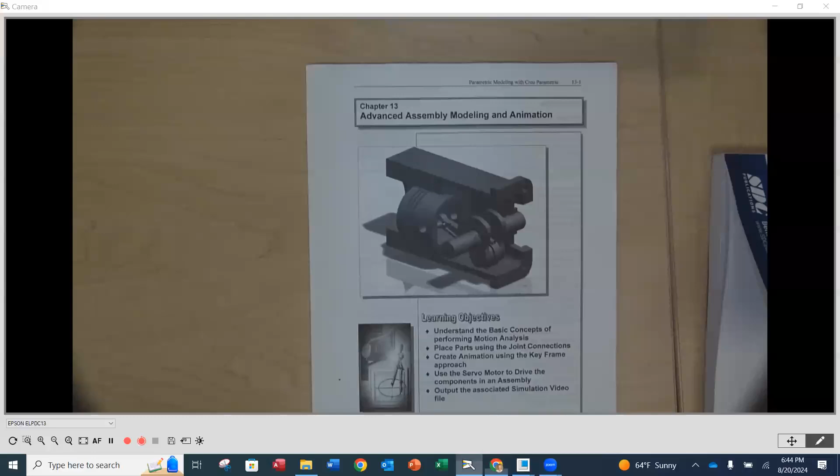So if we go to our learning plan in module 1, you'll notice number 4 says we're going to complete the crankshaft assembly tutorial. I have the PDF for you to reference, as you need to, and I also have it underneath the camera here — this is the in-person version of that PDF.

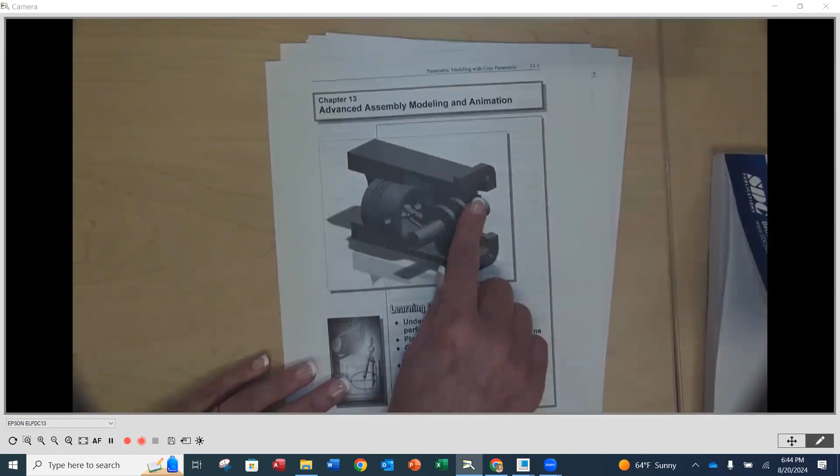So what we're going to be doing is creating this crankshaft assembly here. We've got a piston that's going to be going back and forth in a bore, a connecting rod, and then a crankshaft that this is going to be going around. We're going to be building this outer portion, putting it together, and then animating it so that you can see the motion going back and forth.

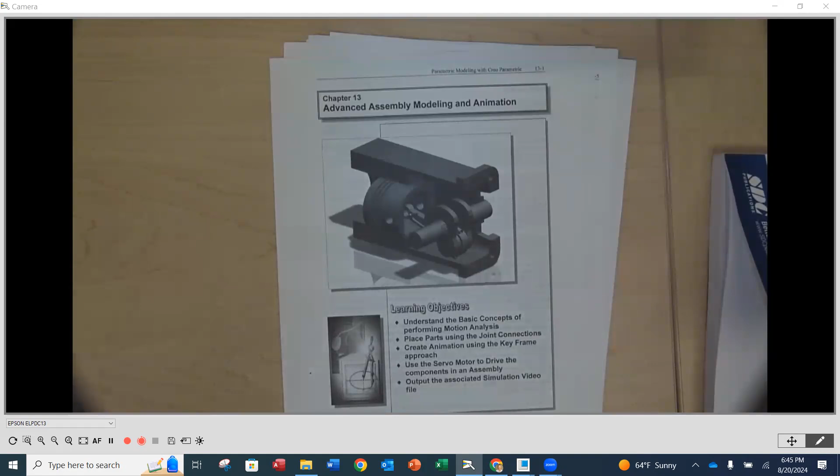It's a nice, simple assembly to put together on the modeling and assembly side of things. It's a great way to remember how to use Creo, because it might have been a little while for some of you, but we're going to be adding on and doing the animation of showing it going back and forth.

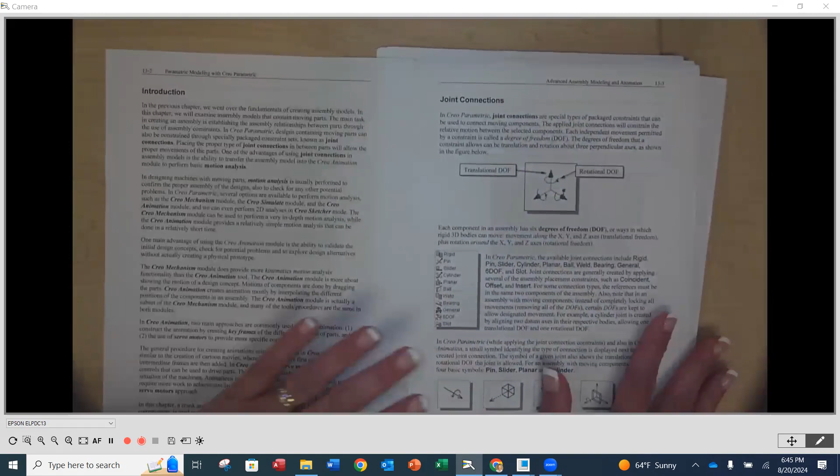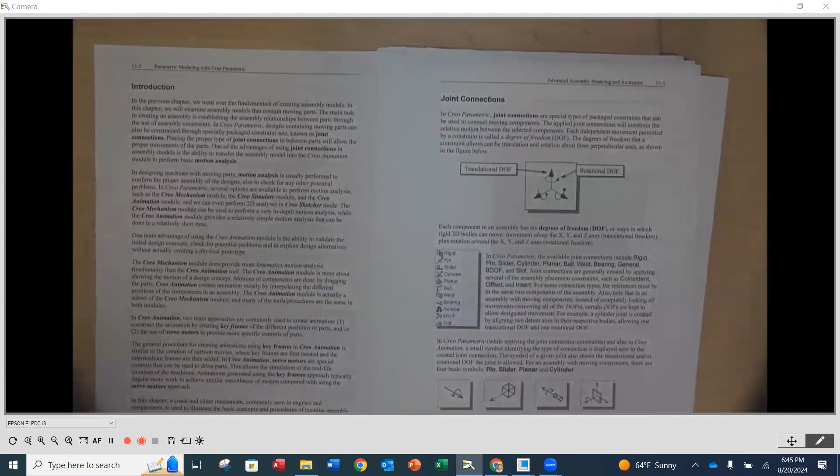First things first, though, we have to create the models, the detailed drawings, and the assembly for what we have here. As we look at this handout, it talks about some advanced assembly concepts. I'm not going to get into that at this point, because I'll be demonstrating some of these things probably the next time we're together or next week — we'll see where timing is.

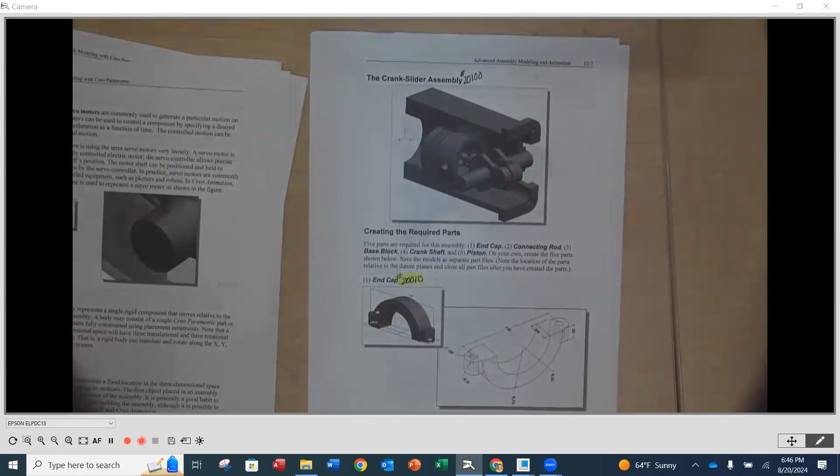But as we go in here, you're welcome to do the reading, starting on page 13.7 is where we see the individual parts for this assembly. First things first, we have to create these models. So the task you're going to have starting today is going to be starting on page 13.7 — you are going to be creating each one of these parts.

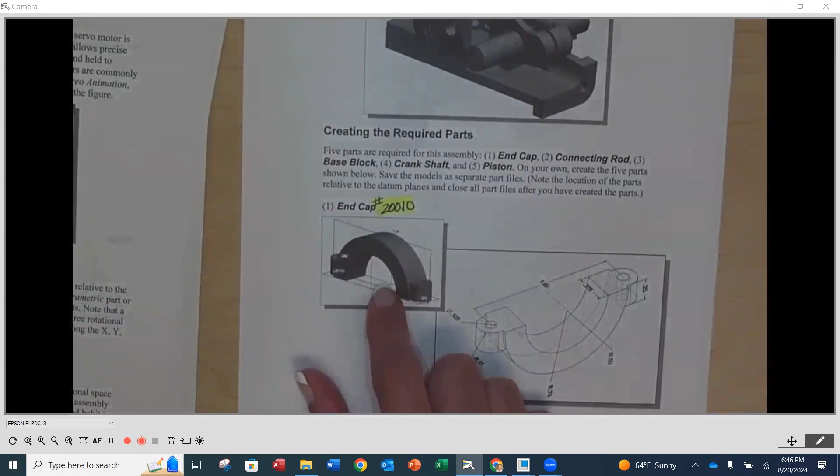The first part that we have here is the end cap. You'll notice that even in the PDF, I have a part number next to this — the part number is 20010. This is the file number that you're actually going to call it. Do not name it or save it as end cap. Save it as 20010, because when you pull up your borders, it's going to automatically populate the part number in the right spot in your title block.

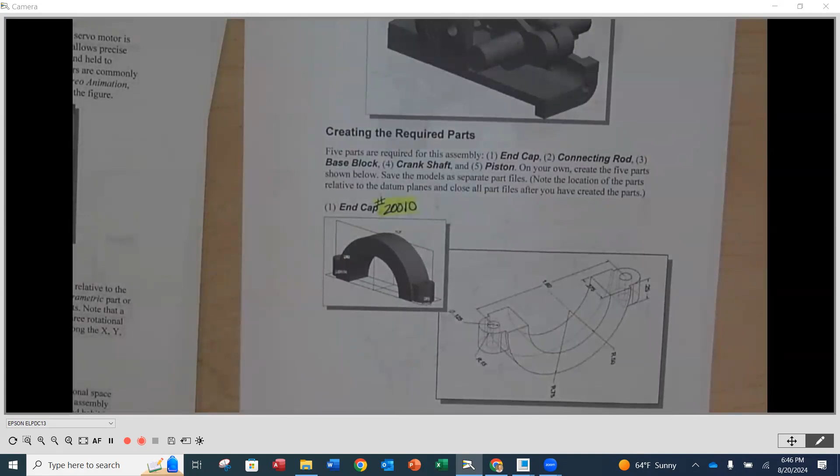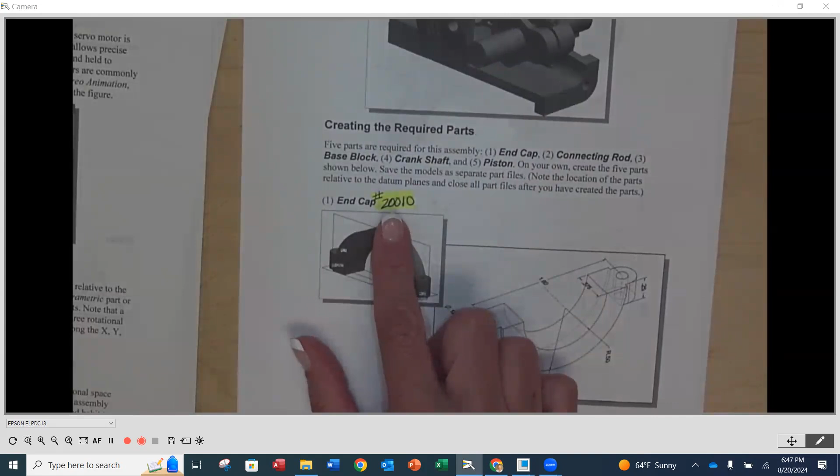If you save it as end cap instead, then where the part number is in the drawing border is going to say end cap and not the part number. So I've given part numbers to each one of these — make sure you save the part number for the end cap as 20010. Then as we go, there are going to be 5 individual parts that we do.

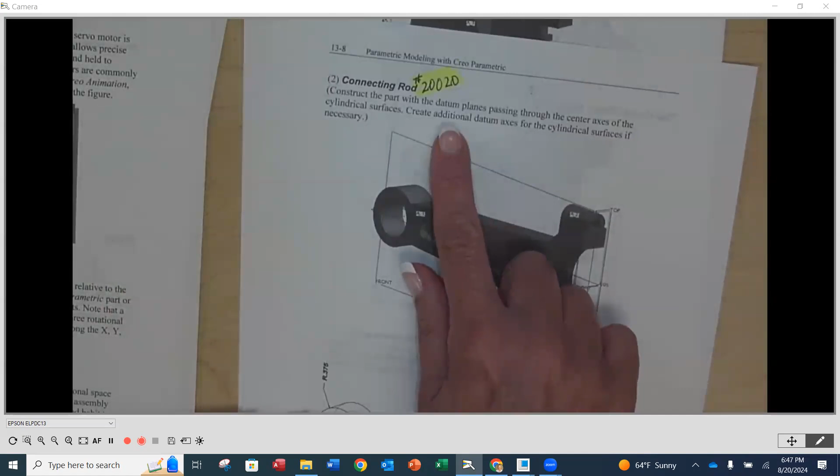Our next one is going to be our connecting rod, which is this — this is going to be 20020. Then we've got 20030, which is going to be our base block, which everything is going to be mounted inside of. Then we're going to have 20040, which is our crankshaft, and 20050, which is our piston — that's the last part.

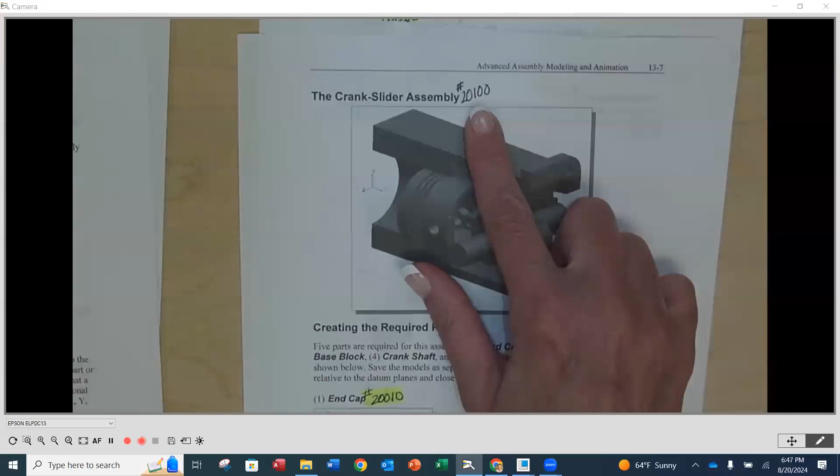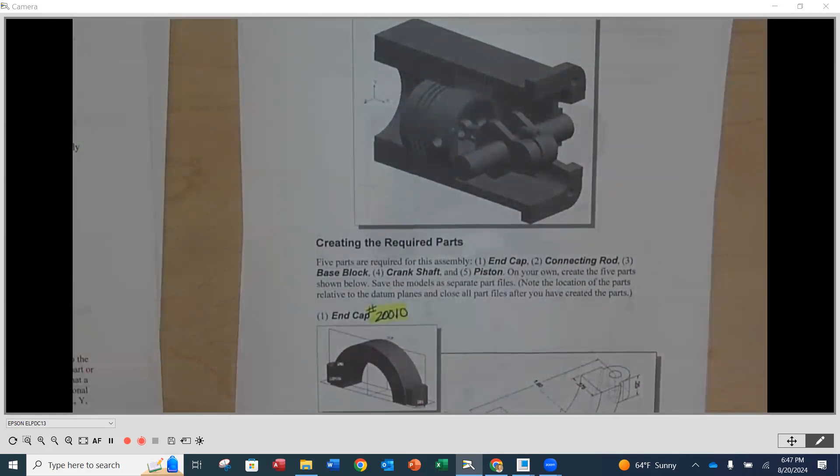So, 5 individual parts. The assembly itself is going to be 20100 — that's the overarching assembly drawing number that we call it out as. Again, your files are going to be named by the part number, so that when we pull it up in our border, it populates in the right place in the title block. Now, the other thing I want you to pay attention to as you go through here is the way that the planes are set up for each one of the parts.

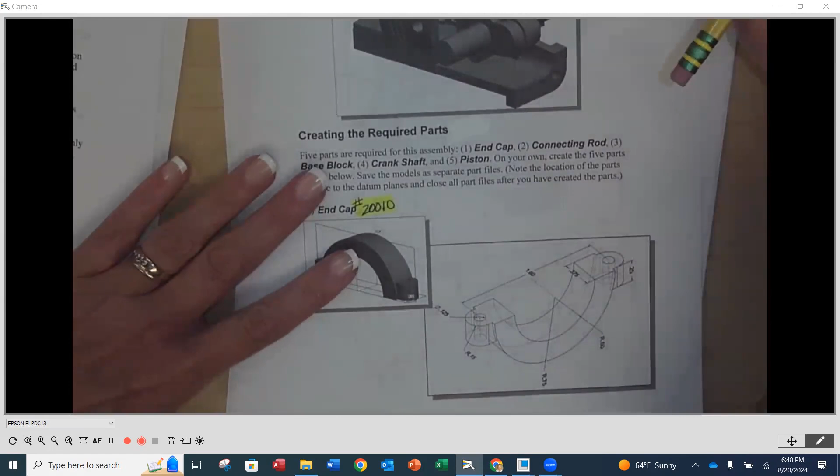So for instance, I want you to pay close attention to, on this end cap, notice that the top plane is here, your front plane is right here. Your top plane is going to be going through right here, and then your right plane is coming in from the bottom.

Try to line those up when you're creating those. If you don't, it's not the end of the world, but it makes it easier later when we're doing the assembly the way that they have it in the tutorial. Just so that you know.

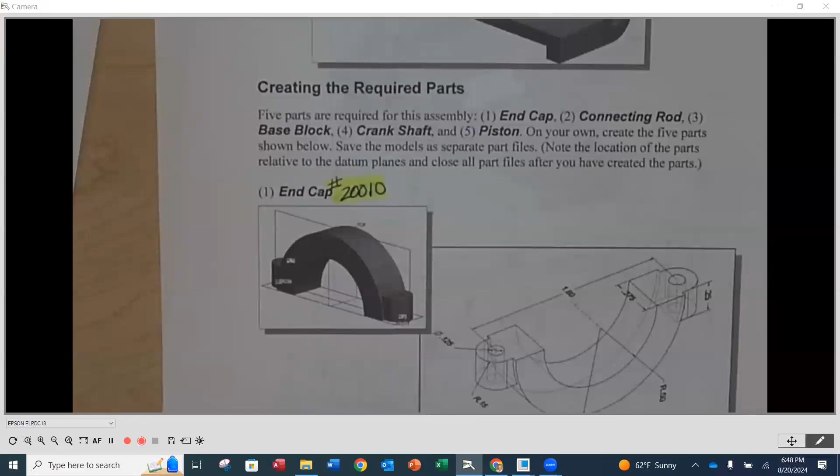So same thing for the connecting rod. As we turn the page here, the front plane is what we're going to be doing our drawing on. Our top plane is right here, and then the right plane is going down here. So essentially, if you model it, it's actually sitting like this, because that's where the origin is, right in here.

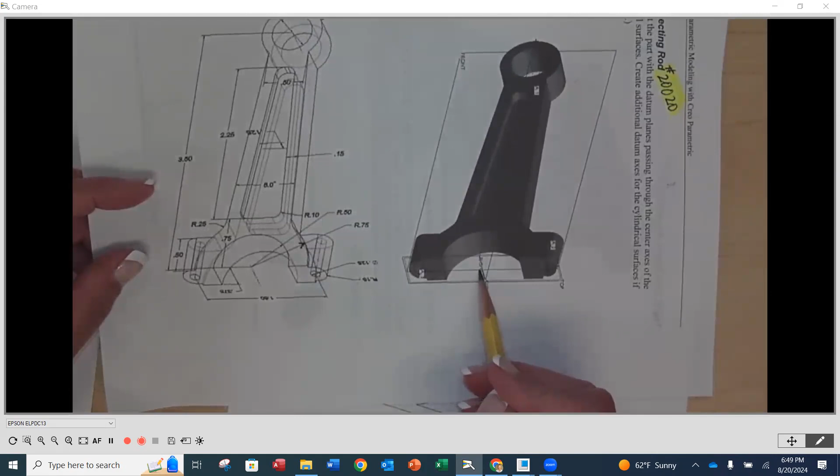Same thing for the base block. Kind of gives you the perspective of the planes. If you have questions about that, let me know.

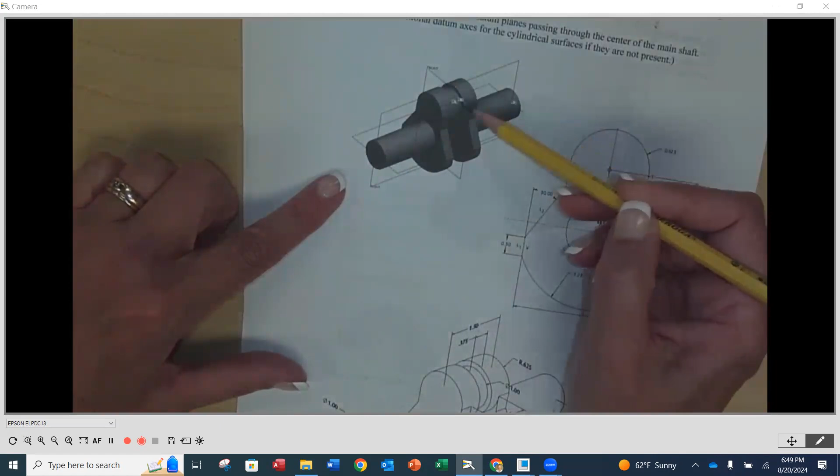And then crankshaft. Notice that we have the front plane right in the middle here, and then it's evenly distributed on either side, and the planes are going down the middle. And then lastly, for our piston, we have those there as well. It gives you some hints and dimensions accordingly.

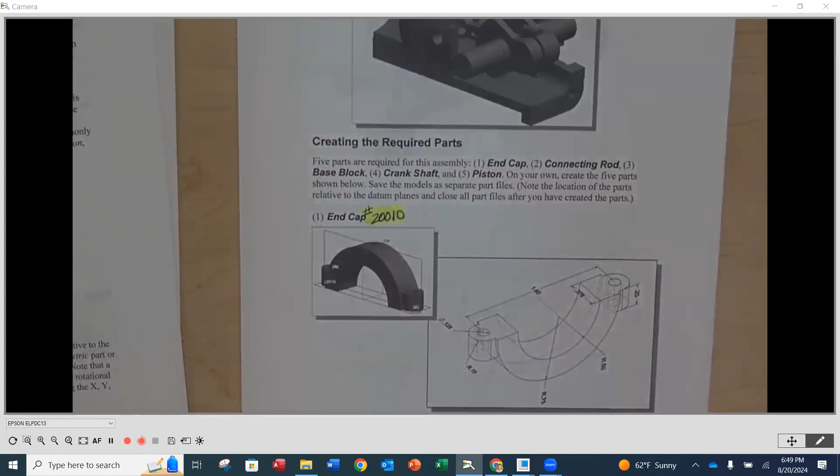So what I wanted to do is start by doing a demonstration of our end cap. This is a pretty simple part. And then I'm going to let you guys go a little bit, because part of what we're doing in this class is getting you prepared for how things are going to be out in industry. A lot of times you're going to be given a set of sketches or drawings that we want you to convert, and now you've got to get these into their final form.

First things first is going to be the models. Now I want to go back, and we will be looking at the end cap, but I want to show you what you're going to be handing in as far as this assignment. So part models are first, and that's what we're going to be talking about here today.

The second thing that you're going to do is once we have the part models, we're going to put the assembly together, so this is going to be the assembly model. Then the next part of this assignment is the detailed drawings for each of the individual parts. So we're going to have 5 models on the top, and that's going to be 5 details then for the detailed drawings. Then we're going to have an assembly drawing that corresponds to the assembly model. Those two go together. And then lastly, we're going to have the animations that we're going to be creating at the end. But first things first, we have to do the part model.

So you've done these first 4 things in your fundamentals class, and that's why I think this is a great project. The parts aren't super simple, but they're kind of medium parts to work with. There's some geometry there, but they're not super complex. They're all things that you would have done before. And this is a great opportunity, once you get the models made, to now make the detailed drawings.

And remember, how do I put a border in? I'll demonstrate that for you. Don't worry, how do I do my dimensioning? I'll talk about some of the nuances. And it gives you that chance to reacclimate to the software before we start getting into some really advanced stuff.

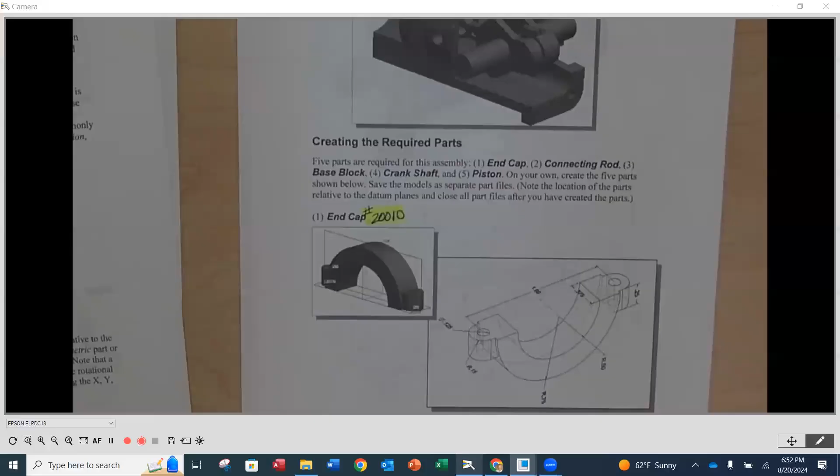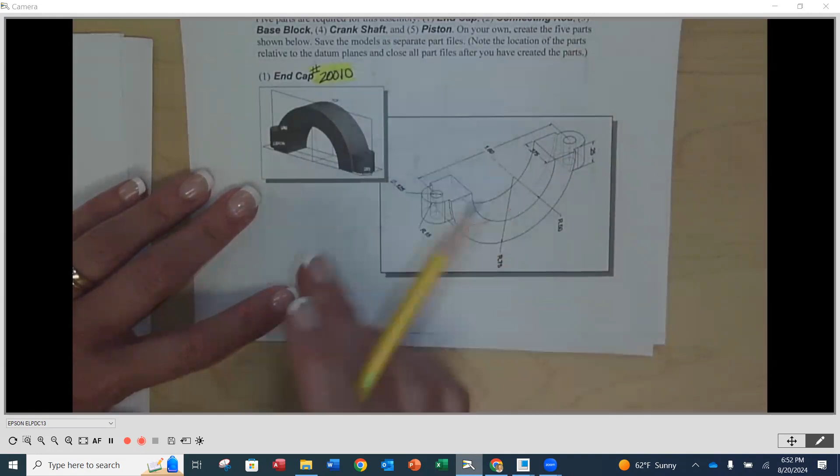Okay, so let's take a peek at the part models. Like I said, let's start out by looking at the end cap. So what we're going to do is create this end cap. The dimensions are here in this perspective view, but this is giving us kind of how we're going to be orienting the part in the actual part in Creo.

So I'm going to go into Creo, and first things first, you want to make sure that you have your working directory selected. Don't just start new and open — even if you're opening something out of your working directory, you have to first set that working directory before you open up out of it. It's going to let you, but then you're going to have problems saving later on. It's just kind of the weird thing about Creo. So set your working directory, make sure it's where you want it to be, and then you're going to hit OK.

I selected it. Why is it not? Okay, I think we're okay. Then you're going to go into new.

And if you remember, it's going to pull up this menu, and we need to select what we want to do. We're going to be creating a part file. And remember, our file name is not going to be the name of the part. Our file name is going to be the part number.

So for this one, for the end cap, it's 20010. And in the common name, you could put end cap. Go ahead and use the default template, and you can hit OK.

Yeah, oh yeah, it's going to tell me it's already there. So I'm going to hit close. I have to do an _1. Don't do an _1 for yours. Just put in the 20010.

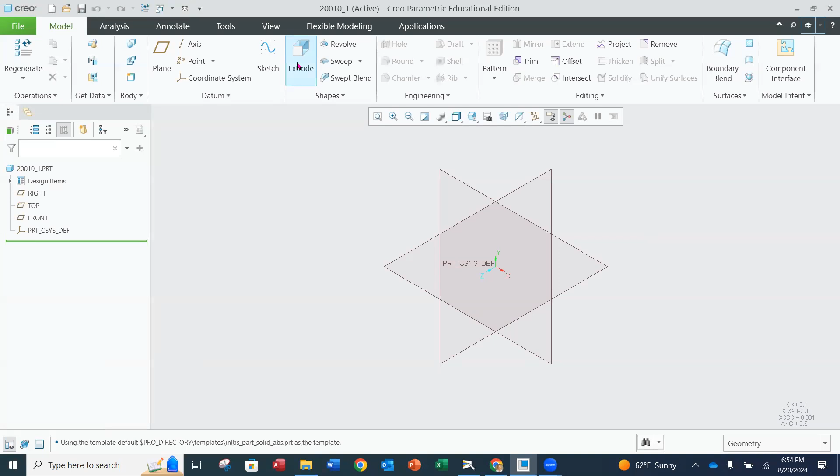And now we're going to be in that familiar place kind of coming in here. Now at the top, we want to make sure that we're on the ribbon that says model. And then these are going to be kind of our familiar commands. In the middle-ish here, we are going to do an extrude.

So we're going to go in under the extrude, and the extrude is going to ask us, what plane do you want to be on? We want to be on the front plane. So over here, we just want to highlight, and it's going to be this one right here. Make sure it highlights and it says front. Once it does, you can left click.

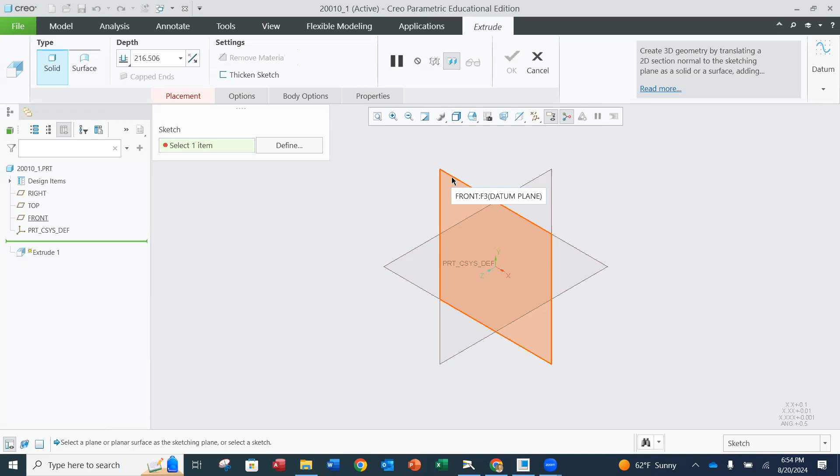And now this was that configuration that we did that now is orienting the sketch plane to where we're looking at. This is that, whatever it was, display to 2D or sketcher to 2D. And at the middle here, this is going to be our origin. This rectangle on the outside is our front plane.

So now when we look, what we're going to be creating is I'm going to start with a circle. This is another nice update that you're going to notice. We're going to go on the origin. Remember, in order for this to know in space where we're at, we always have to tie to the origin. So try to look at your part where there's a natural origin, and that's going to be the center of our planes here as we look.

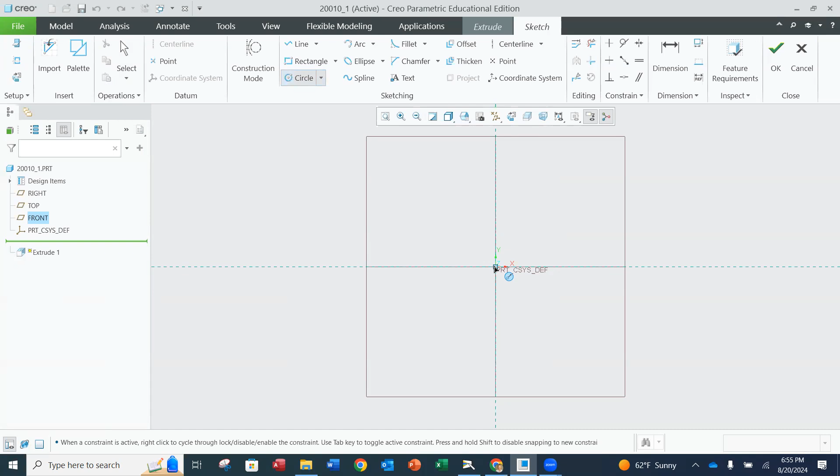And I'm just going to do a simple circle. Once we get done with that, you can click on your middle roller mouse button, and that's going to end that circle. So it's going to kind of be getting used to the mouse again. It's a little bit different.

Now, remember how Creo used to use these big numbers, always was like, right now it says my diameter is 190 units big. And if you would double click on that and you would change it - so in our case, this needs to be a diameter of, it's a radius of 0.5, so it's a diameter of 1, enter. It would make that circle super small.

Do you guys remember that? Or you'd have to zoom way in. Look at what it does. It doesn't do it anymore. It automatically scales the drawing now. That is something that matches what SolidWorks does, which is really nice. And that's an update in this version, which is cool.

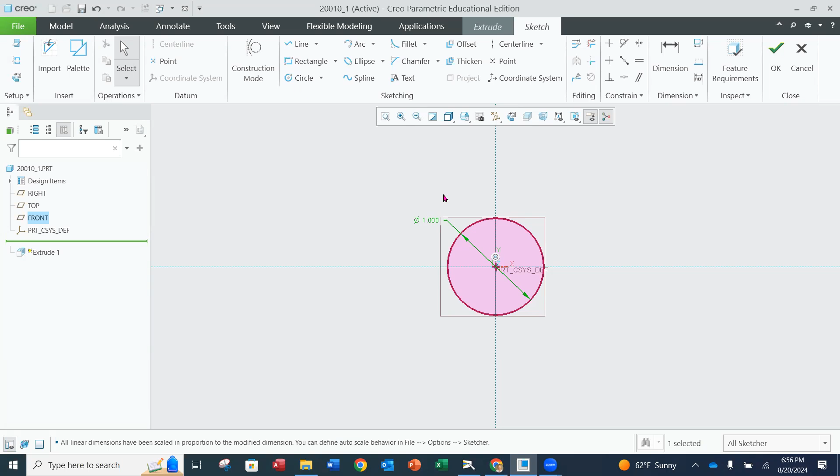So now we have that circle there. I'm going to do my next circle, share the same center, a little bit wider, middle mouse button to end that one. And this one's going to be 1.5 diameter because it's a radius of 0.75.

Now, in order to make the flat here, I'm going to do a line. That line is right up here in the sketch mode. I'm going to left click when it snaps to the intersection here and across here. And then I'm going to hit escape.

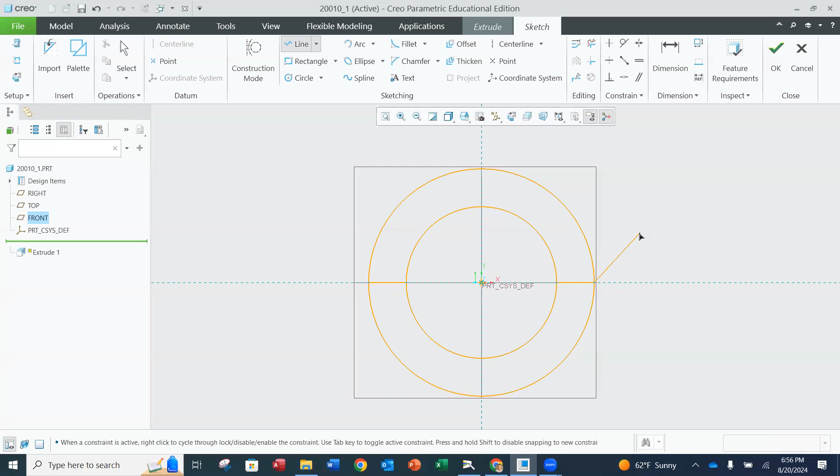The nice thing about Creo is that I'm still in my line command. It didn't exit out. So I hit escape once, and now I can continue with another line over here and here. And I can hit escape, and I have to hit escape one more time to end that command.

Now that I have these lines here, because I only want half of the circle, or the arc there, now I'm going to go up. If you remember in the editing area, this is going to be delete segment.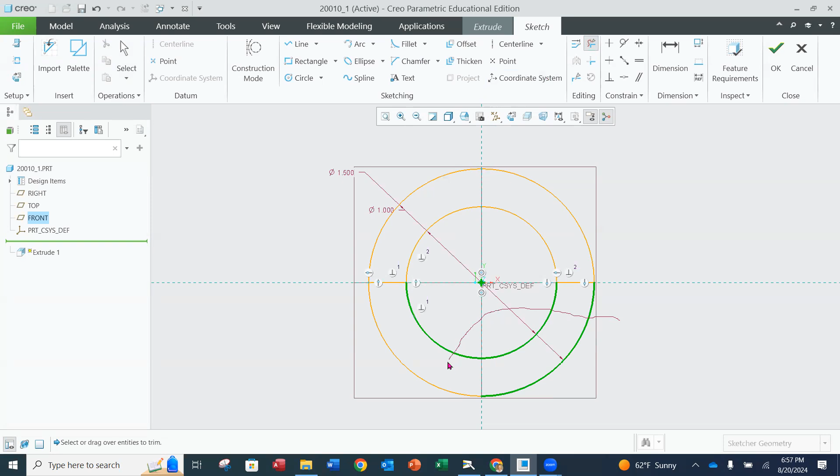I'm going to click on that, and how delete segment works is I am going to left click and drag across the portions of the lines that I don't want. And then I'm going to release when they're all selected. Do you guys remember that? Okay.

It is really nice. It is really nice. Now what I'm going to do is I'm just going to left click or hit escape to get out of that command. Otherwise it stays in there. Okay. And now, I don't know, I'm kind of anal this way. I like my dimensions to kind of be off the part so that I can see them.

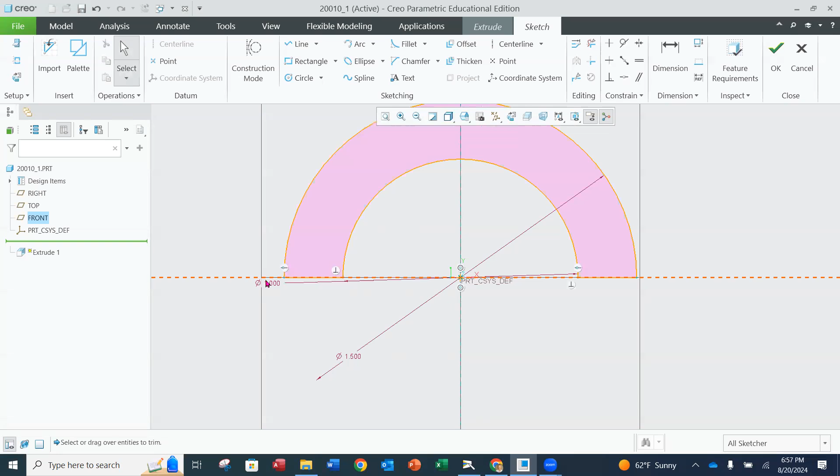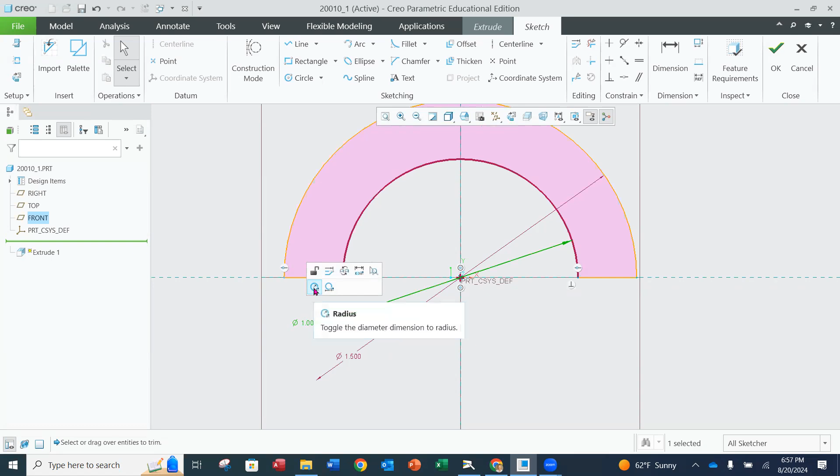Additionally, right now, these are diameter dimensions. If I would use this for my drawing and I would export it, or I would start the drawing from this model, it would dimension those as diameters. Since they're not full circles, and you'll notice that on our model here, they need to be radiuses. So I'm going to left click on that dimension, and right here, this dialog box is going to come up, and I can change this now to a radius. So it toggles between radius and diameter.

Same thing for the 1.5. I'm going to left click on it, and I'm going to toggle to that radius. And now this way, when I do my drawing, it's going to go to the radius right away. I don't have to mess around with that and change it. You can at the dimension level, but it's nice to do it here so you don't have to worry about it later. So those are the first two radiuses.

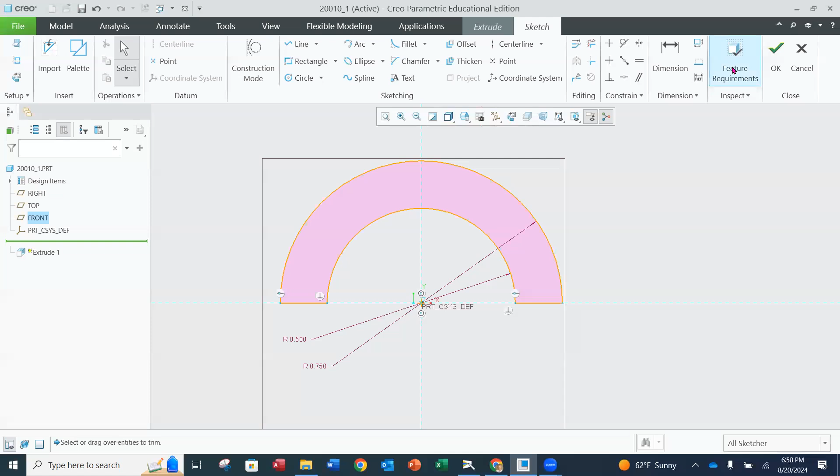So now what I'm going to do is I am going to check if I am fully defined. Creo does this differently than SolidWorks. SolidWorks will have it fully defined at the bottom, and it'll have everything black. But what we need to do, if you remember, we got to go to feature requirements up here next to the okay. And as long as we've got all green check marks, that means that we're good to finish up this command and go to the extrude. So I'm going to hit close. I have green check marks and I'm going to hit okay.

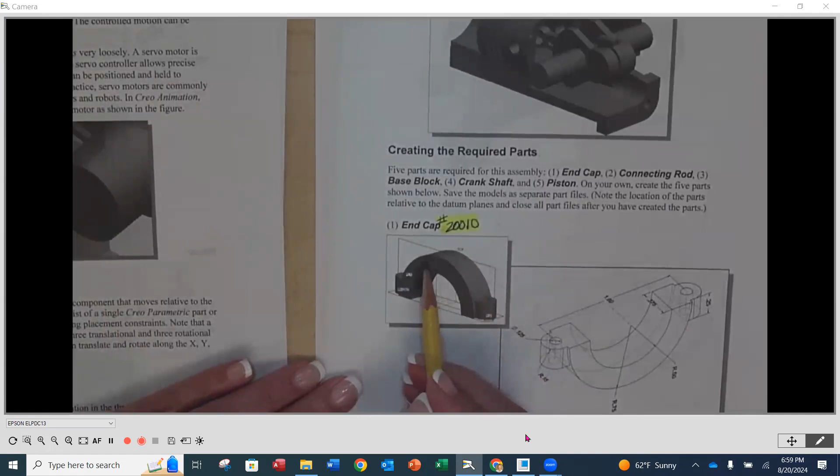Now I want to look at how this is going to distribute. So remember, I sketched on my front plane and we're in the extrude command. So it's like creating thickness here. If we look at our page 13.7 underneath here, you're going to notice that we want this plane to go through the middle of the part. So instead of extruding all on one side, we are actually going to do what they call in Creo a symmetric extrude. So we're going to go down underneath depth here for how thick we want it to be.

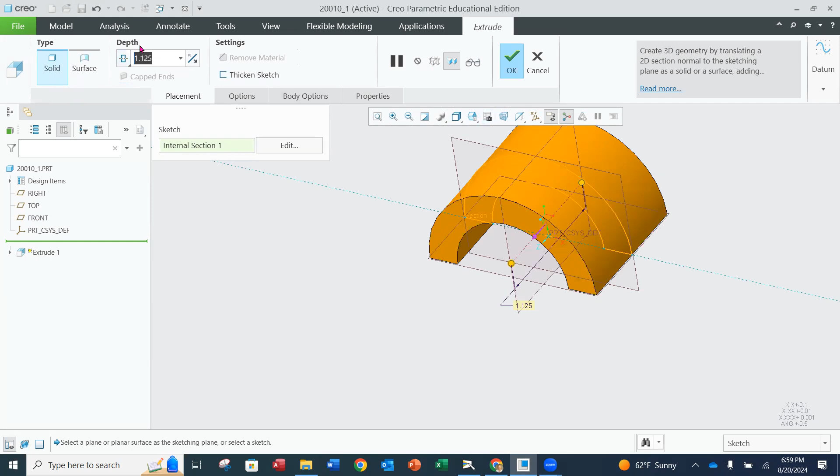We're not going to go to a blind depth. We're going to arrow down and we want to click on symmetric. Now what that does is it's going to evenly distribute whatever our dimension ends up being equally on either side of that plane rather than on one side of the plane. You guys remember that? Okay. So now you can kind of see that happening. And I want this distance to be 0.375 thick. Enter. And then that's going to be the thickness that I'm at. Okay. And if it looks good, you're going to hit okay. And now that's my first feature.

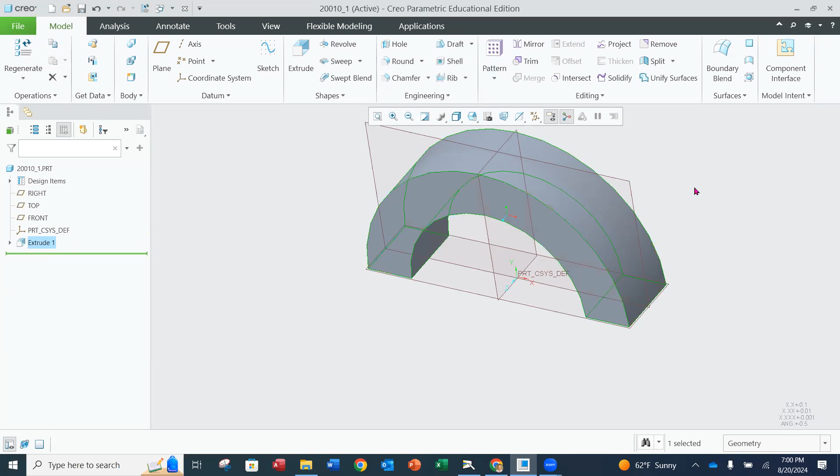Now, something I want you to do, which is very good practice. We were doing this in GD&T when we were looking at SolidWorks. I want you to rename this from extrude 1 to something that means something. Now, for this one, I'm going to call this profile. And if you use more than one word here, again, Creo needs you to do like an underline instead of a space. It won't accept spaces at this level either. I'm just going to use one word, call it profile. And then I'm going to left click off of it. Okay. And there we go. So that's our first feature, if you would.

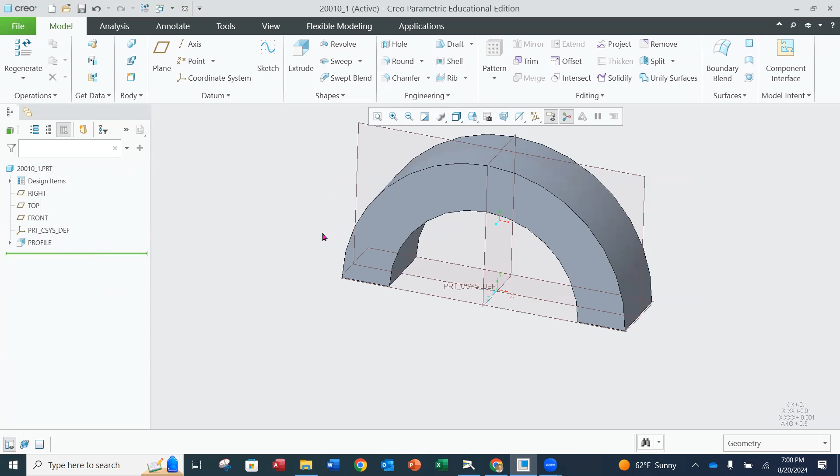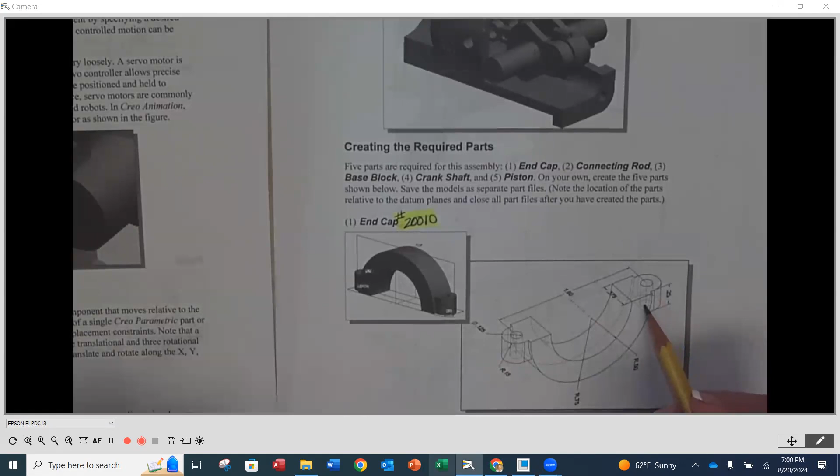The next feature that I'm going to create, I go back underneath, I'm going to create one of these feet on this side. Okay. Now I'm going to do the half circle. It's going to be from center half of 1.6 to one side. And then I'm going to extrude one side. I'm going to then put my hole in. And then after I have the foot and the hole in place, I'm going to mirror that as features on the opposite side to finish my part.

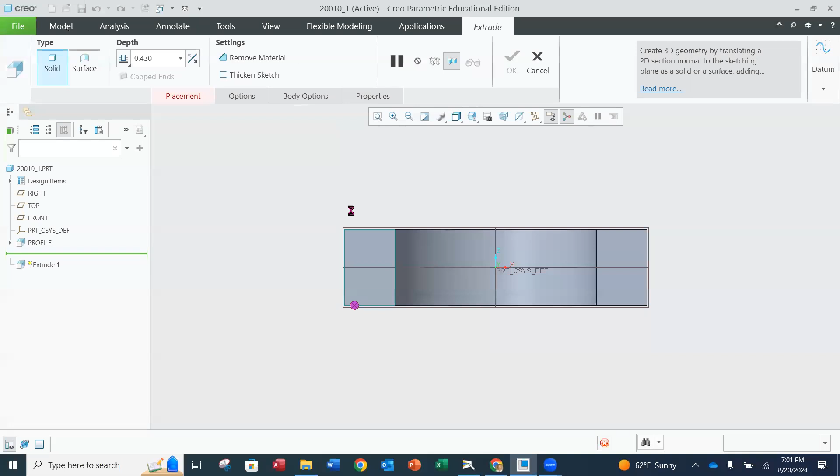So I'm going to go back to Creo over here. I'm going to rotate this around. Remember my middle mouse button, I can use that to rotate the model around. I'm going to do another extrude and I'm going to pick this surface on the bottom here. Okay. And now I'm going to sketch on this. I'm going to start on the left side. You could do left or right side.

I'm going to do the left side. I'm going to do a circle and I want it to be in line with my origin. I don't know if it's not going to grab it. That's okay, I can make that happen in just a little bit. And I'm going to make a circle here, and then I'm going to middle mouse button to end it.

Double click here on that diameter. It's a radius of 0.15, so it's a diameter of 0.3. And I'm going to left click it and change it to the radius right away. Now, I need this to be in line with my origin, so I am going to add a constraint.

Okay. So the constraint I'm going to add is going to be the horizontal constraint. I want it to be in line horizontally with the origin and the center of my circle that I created. So I'm going to click on horizontal. I'm going to click the center of my circle and the origin. And now it's going to align those. And you should get this little symbol here with that little dotted horizontal line.

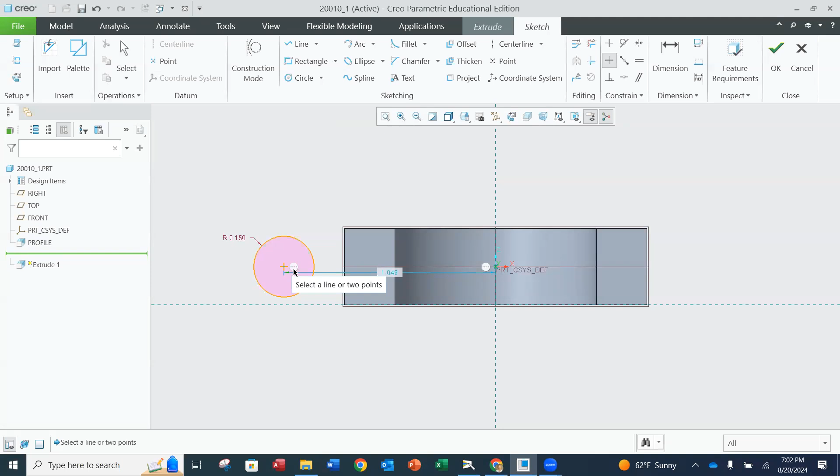Okay. Now, the other thing I need to do is I need to identify what my distance is from the origin out to the center of that circle. And that needs to be half of 1.6. So I'm going to double click on this dimension and it's going to be 0.8. If you don't have that dimension, then just make that dimension from that origin to the center. Okay. And now that is 0.8.

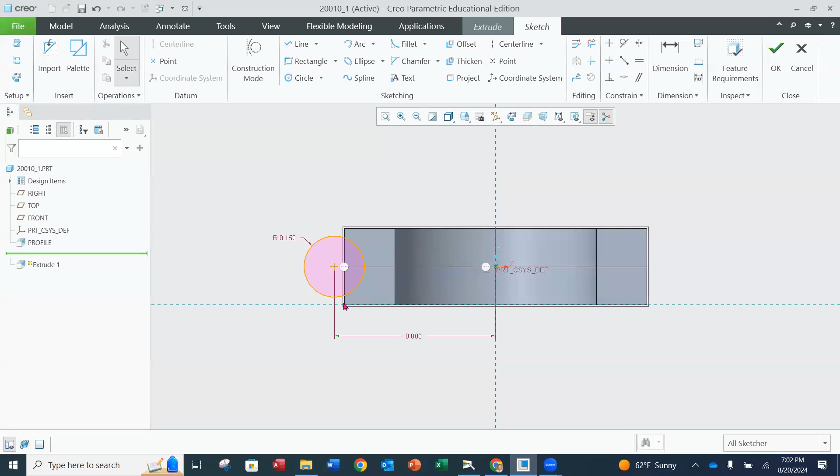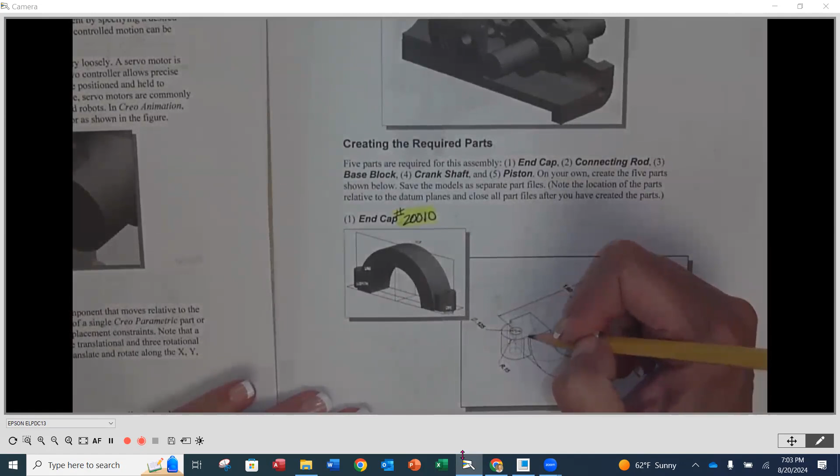Now, if we look at the configuration here, it's not just a circle going up. There's two lines that are going to go to the center. Now, because this is arched, if I go to the end right here, it's not going to blend in as it goes up. Do you guys see that? Because it gets wider. Okay.

So what I'm going to do is I'm actually going to create my lines to the inside portion and then extrude that because it'll merge the material anyway. So it's not going to double up on material. It's just going to merge those together. So I'm going to go back over here. And here is the inside of that foot. I want to project that.

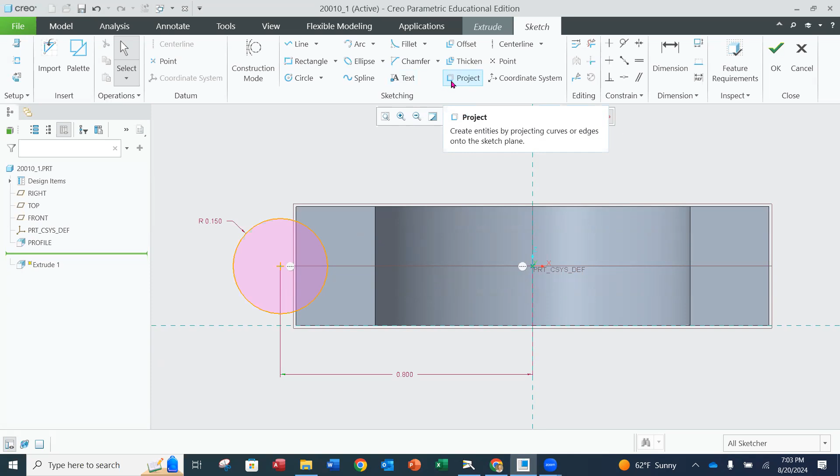Now, if you remember back from the fundamentals of 3D modeling in the first Creo class, we can project elements from previous sketches and use them in our current sketch. So you'll notice that here is the side of that, if you would, the bottom of that profile. I'm going to take a horizontal line. I'm going to go all the way to that and then extrude that up. But instead of drawing another line, I'm just going to simply project this line right here.

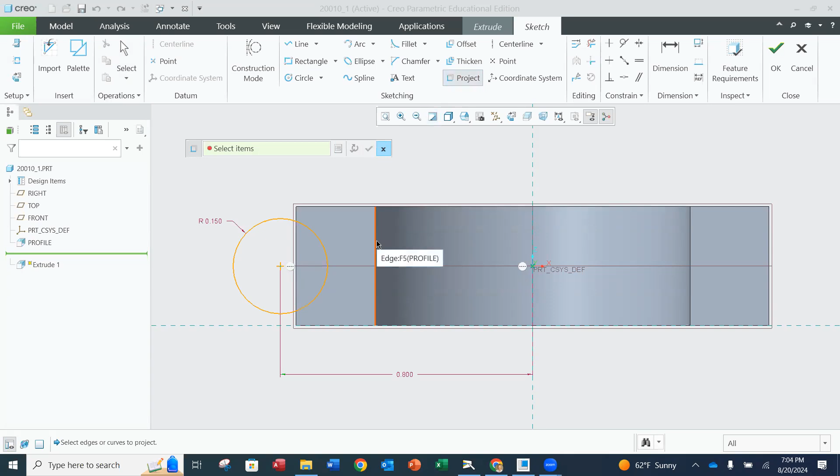When I hover over it, it's going to highlight. I'm going to left click it. And then I have to hit the green check mark here. Okay. And now that line is in my current sketch. Does that make sense to everybody? You can use stuff that you've already created in previous features from those previous sketches, but you have to project them into your current sketch. So now I have that horizontal line there.

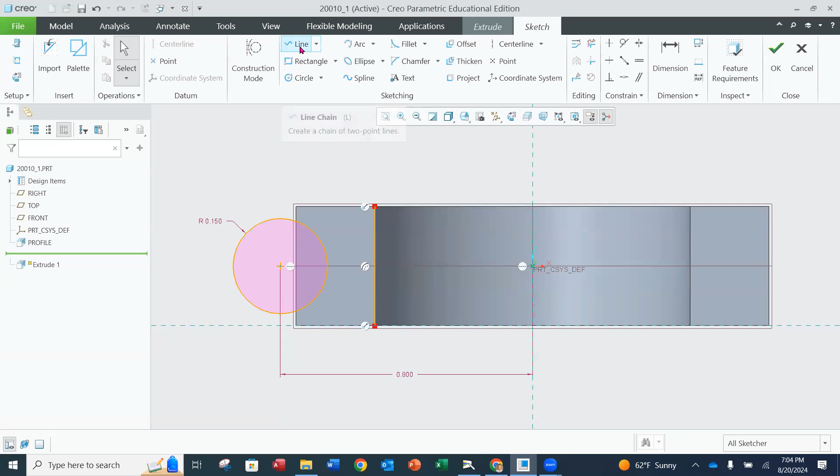I'm now going to create my lines from the quadrant. So I've got to start at the quadrant here, so it's gonna snap to that quadrant. I'm going to left click and then, oopsie, I don't think I got the quadrant. Let me try it again. Line, left click, and then I'm going to go all the way over here. Make sure you get the quadrant, and then it makes a horizontal line, and I'm going to left click when it gets there. And then I'm going to hit the middle mouse button.

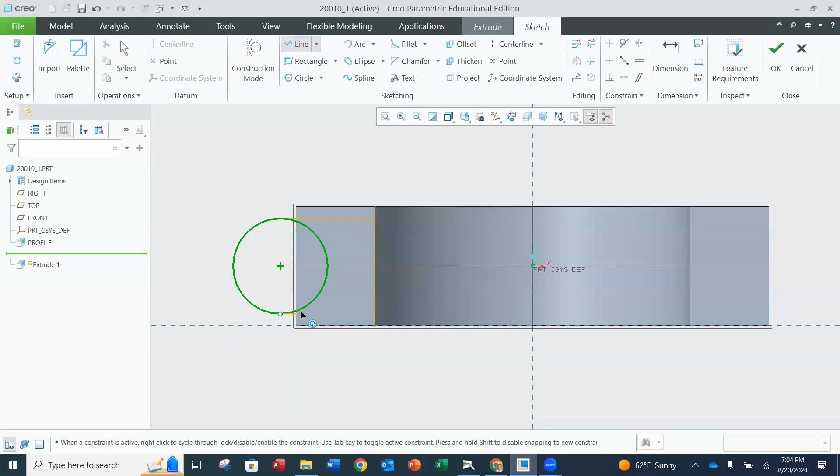I'm still in my line command. I'm going to go at the bottom, and then I'm going to go perpendicular over here, and then middle mouse button twice to end that command. You guys got that? Now I need to get rid of what I don't want.

So I'm going to go back up here to delete segments in the editing. And I'm just going to left click and drag over the portion I don't want, over the portion I don't want, and then over the portion I don't want, those two. So I'm going to be left with the rounded part here, my horizontal line, my vertical line, and horizontal line. Okay.

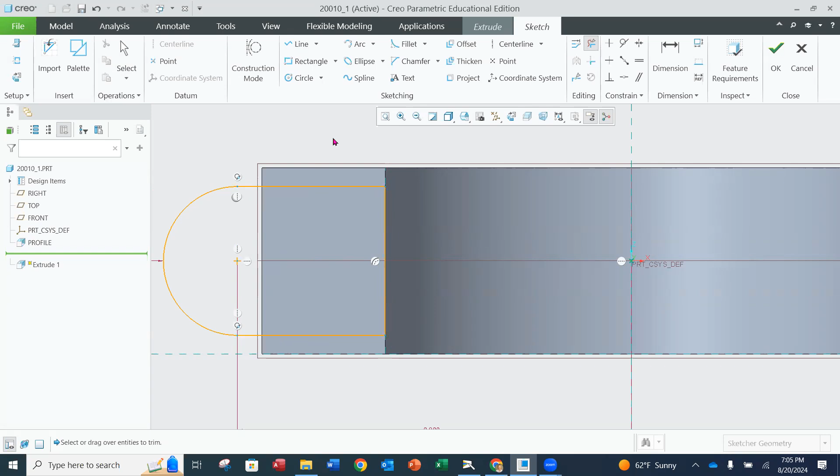Now, you'll notice that it's still gray in there. Either hit the escape key to get off of that command, and you should see this kind of fill in with that pinkish color. Now, you'll notice that that is the sketch that I drew at the bottom here, and I want to extrude this up 0.25 inches.

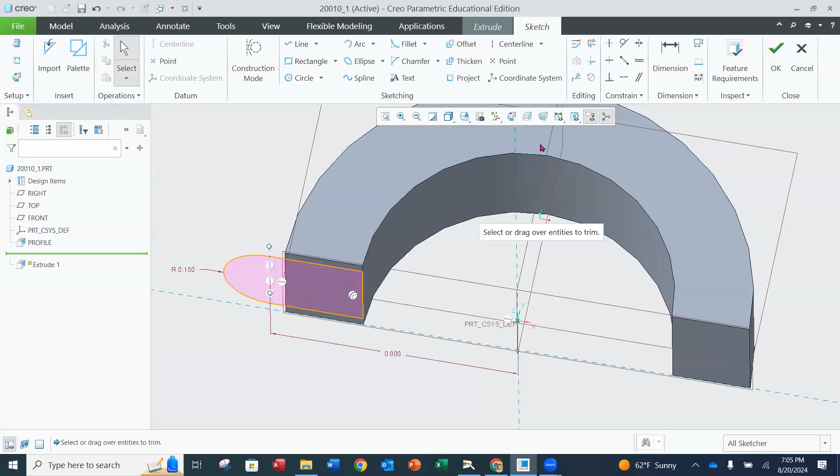Now, before I do, I'm going to hit my feature requirements. Make sure I have all green arrows. If there's any of those yield signs or red check marks, that means that you probably don't have your geometry coming together, or you don't have it fully defined. This is your insurance that you're ready to do the extrude. Okay. So I'm going to hit close because I'm good. I'm going to hit OK.

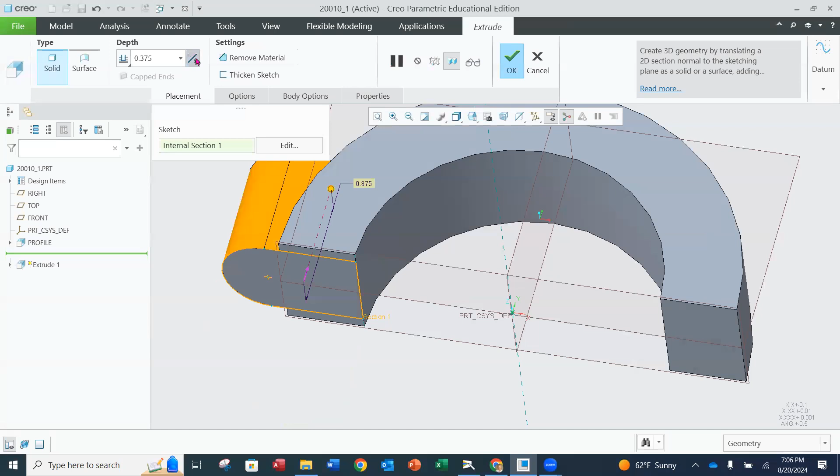And now here again, I went in underneath the extrude command. It's going to assume a direction, and it's adding it to the wrong side. So to toggle the side where you want it to go is to the right of your depth dimension. This is the toggle to the side of your sketch plane that you want to, oopsie, dang it. If you do that, I have to edit that feature. I was trying to do a rotate here.

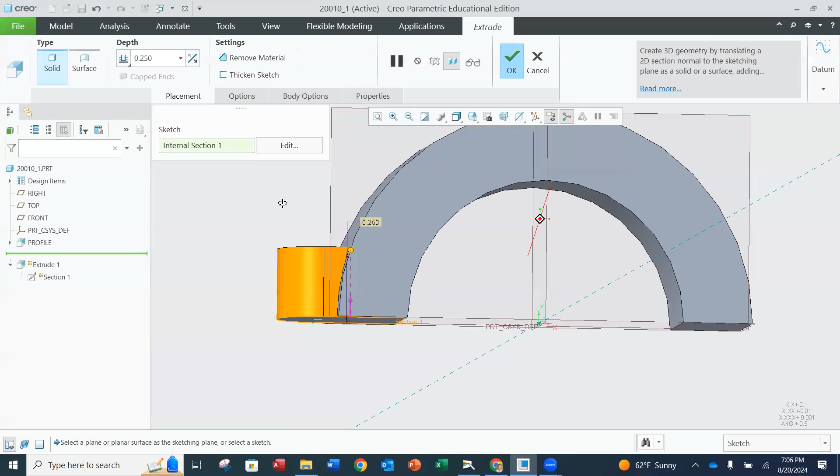In this case, it's doing my depth of 0.375. The dimension on the drawing is 0.25. So make sure you change that. And as long as that looks okay, which it does, I can hit OK. And again, it merged it together. If I would have started with this at the flat here, it would have gone straight up and it wouldn't have connected here. That's why we went to the inside portion of that profile.

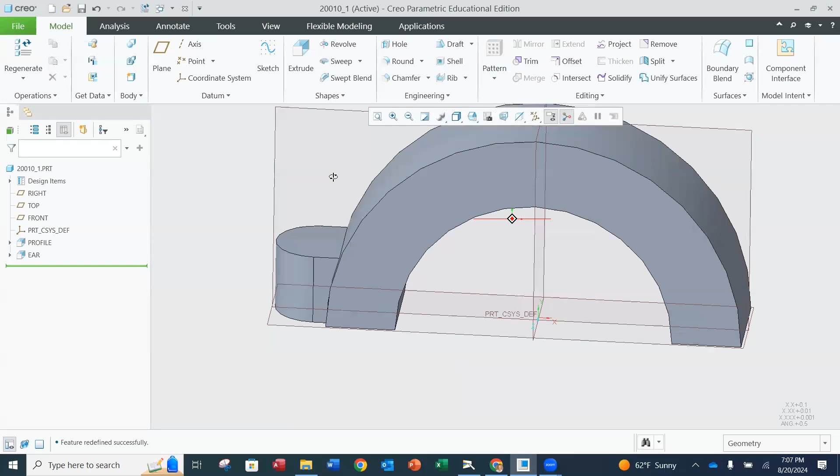So I'm gonna rename this to ear. You can call it whatever you want, ear or foot. Foot might be a better name if you want to do that, but just something other than extrude 2. All right, now is a good time to probably do a quick save. So I'm going to do file, save, and it should go to your working directory. You should see your file name as the part number, and you're going to just hit OK.

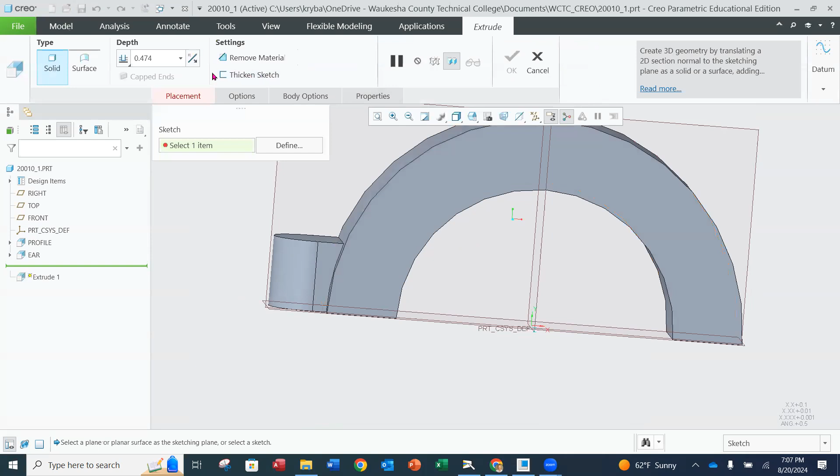All right, now before I do my mirror of my ear, I'm going to put my hole in here, okay? So I am going to do extrude. I am going to select the bottom of my foot here. And I am going to put my circle in here. Now, you might say, why didn't I do a hole at the feature level? That's a personal preference. The hole wizard in here is okay. So if you want to use it, you can at the feature level, but I find, especially if it's one simple hole, it's easier to put in at the sketch level as an extrude than to do it otherwise. So you can play with both.

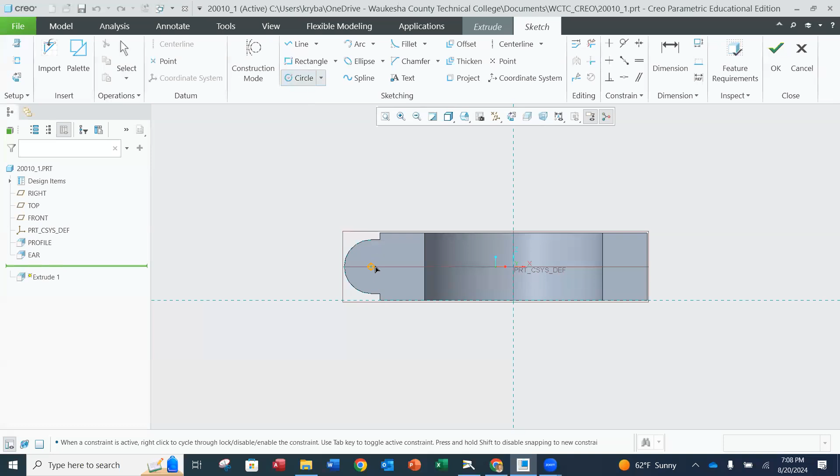So now I'm going to do my circle. I'm going to activate the outside of my ear so that I can then select that center so they share the same center. Okay. And I'm going to middle mouse button to end it. I'm going to double click on it and I think it's 0.125. All right. Now, if you activate it and got to the same center as the ear on the outside, you're going to notice this constraint of being concentric vertices. And that's going to mean that those two centers share the same point.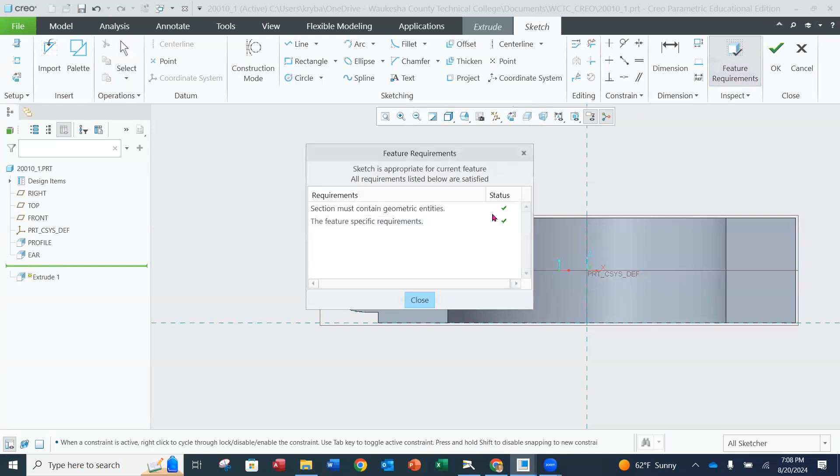Okay. And when I go to my feature requirements, I'm going to have green check marks. If you don't, you probably didn't grab the center. And all you have to do is do a constraint, and there's more down here, or there's the coincident that you can do, and because it's two axes, it'll be constrained coincident. You'll have to add that to it. Okay. Just so that you know, in case you're wondering, but I'm good. So I'm going to hit okay.

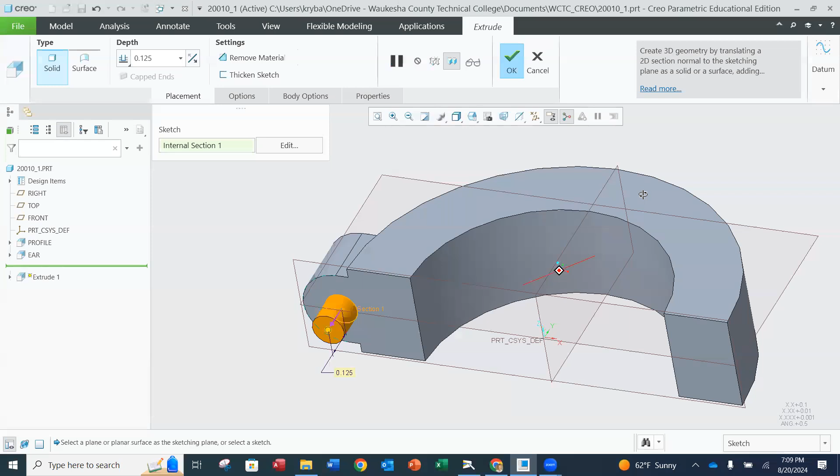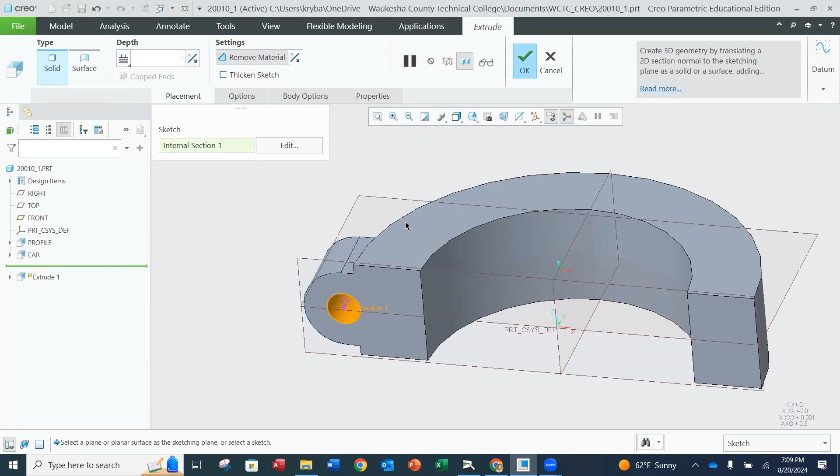Now, this time when I do the extrude, it's going to still assume that I want to add material, but I need to change this to remove material. And now I don't see anything because the arrow is going in that direction. So I want to change the arrow. And now you're going to notice that it's taking material out, but I don't want it to go to a depth. I'm going to arrow down here from blind to up to next or through all, one of those two. So I'm going to do up to next. And then it's going to find where the next surface is, and it's going to go all the way there as a through hole. Okay. You just want to kind of check that. If it looks good, you can say okay.

And now I'm going to rename, oopsie. Cancel, select it. I'm going to right click and rename this to be ear underscore hole. Don't put a space because it won't let you save it with the space. Now that I have these two in here, I can go over my right plane and I can mirror it to the other side. So to mirror, you'll notice that at the model level, mirror is grayed out. It's not available until I select the features I want to mirror. So I'm going to select the ear.

And if I go ahead and I select the ear hole, it unselects ear. So I'm going to ask you guys, do you remember how to select more than one thing, what you have to do? Hold the control key, not the shift. So you're going to hold the control key and grab the other feature there.

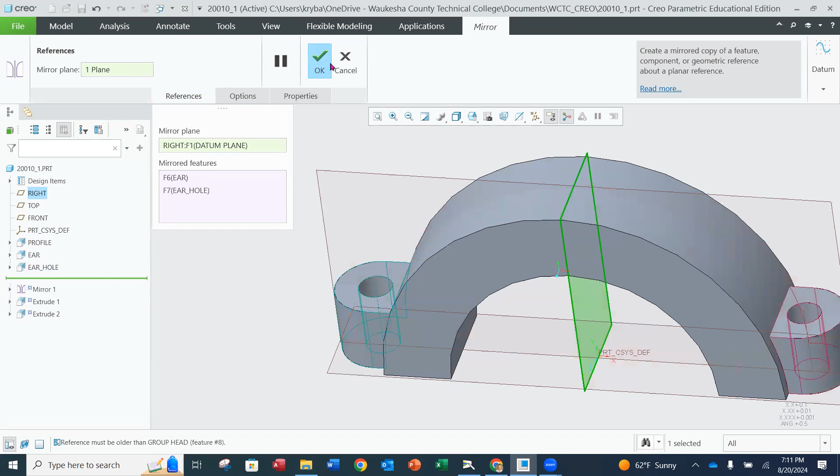And once you do, we're going to go up to mirror. And now mirror is available. And now all it's asking is, what is the mirror plane? And we are simply going to select that right plane, which is right in the middle. And now you're going to notice that it mirrors the ear and the ear hole to the other side. And we can say, okay.

And now our part is complete. And we can just do one more file, save. Now, as you know, I kept saving underneath that same name, file save. At this point, what Creo has done in the background, if I go to my folder and I go to, let's see, my name, it was 20010_1.

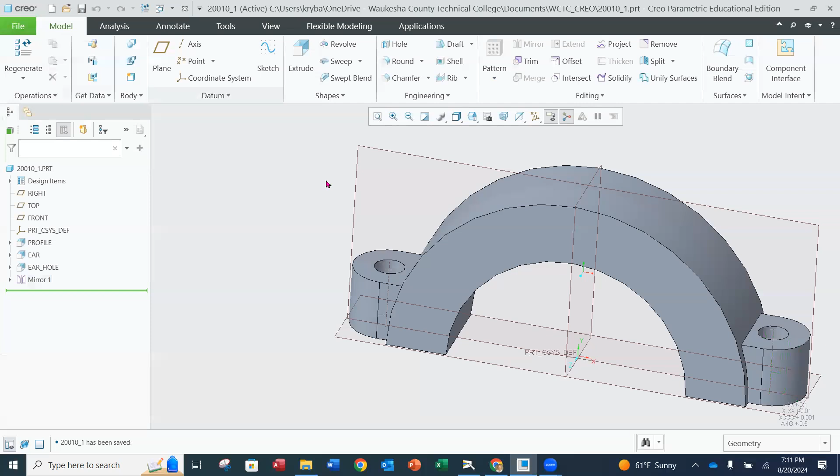It isn't doing that. Hold on. So I'm going to do file, save. Try one more time. Well, I don't know why it's not doing it, but in my working directory, oh, I know why. It's not going to show it here, but in my working directory, there are multiple versions of this file. We don't see it in the actual file manager, but they do save them in there.

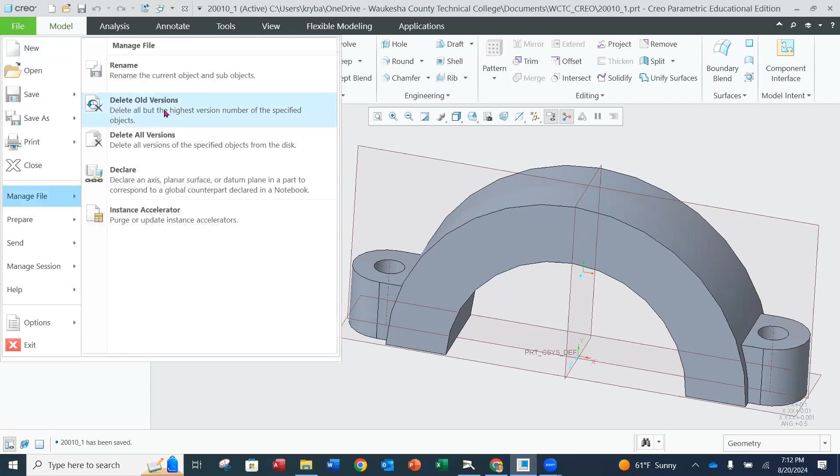So what we need to do before we exit out of here, we need to go into File, Manage File. So you're going to want to save one last time. Like, okay, it's official, my model is all good. Then you're going to go into Manage File. And what you want to do is delete the old versions. Otherwise, they're going to populate out there and take up space. So we want to delete the old versions.

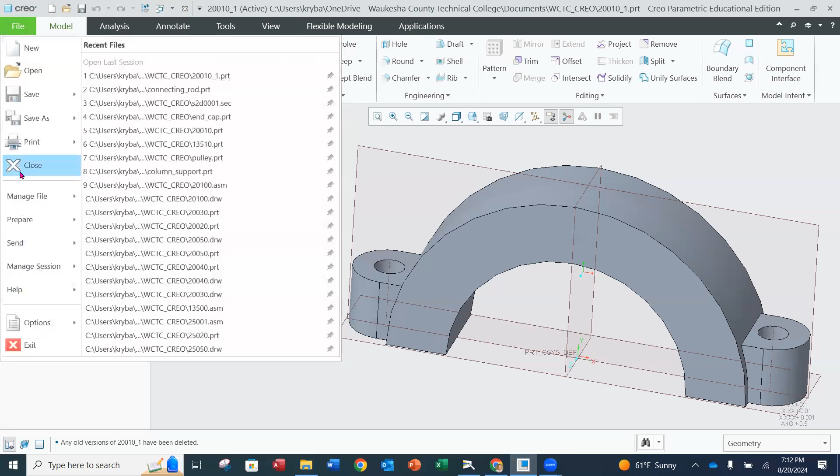And it says, do you want to delete the old versions? You're going to say yes. And then you're going to go into File, Close, not Exit. You're going to go to Close. We're just going to close the model. And then I'm reminding you, we've got to do one more thing. Do you remember what it is?

Yes, Erase Not Displayed. So we're going to go into File, Manage Session. Not Manage File. You're going to go to Manage Session and you're going to Erase Not Displayed. We're going to click that. And now this is going to be that model in the background. So now if we go one more time to erase not displayed, there shouldn't be anything that comes up, okay? So it's a process. So you guys kind of remember all those little Creo nuances, all right?

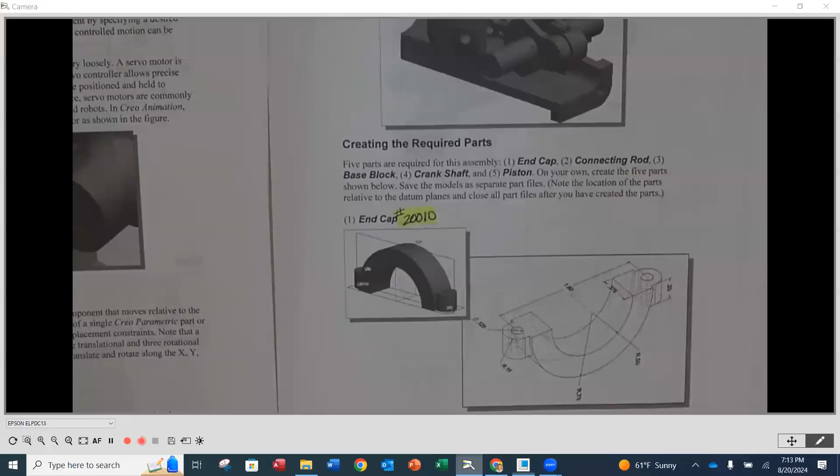So what I want you to do then is in that PDF, you are going to continue on. That was our first part. If you followed along or if you need to go back and do it, no problem. Now you're going to turn the page, and our next part that we're going to create would be the connecting rod and then the crankshaft. And like I said, there's 5 total here that you're going to put together.

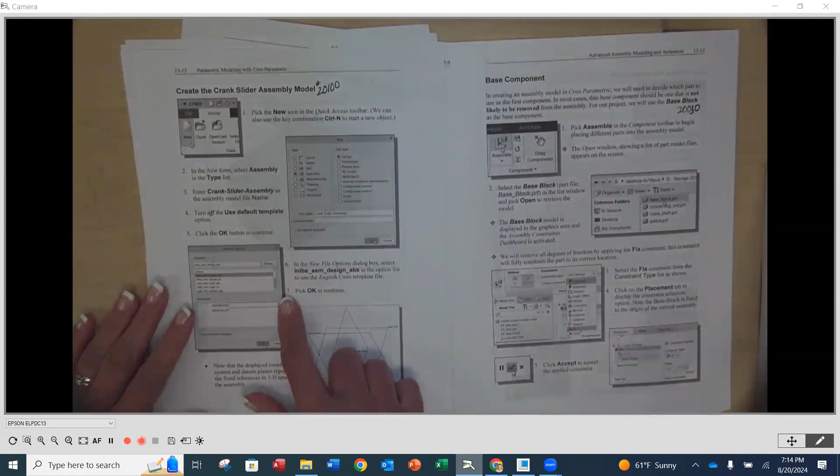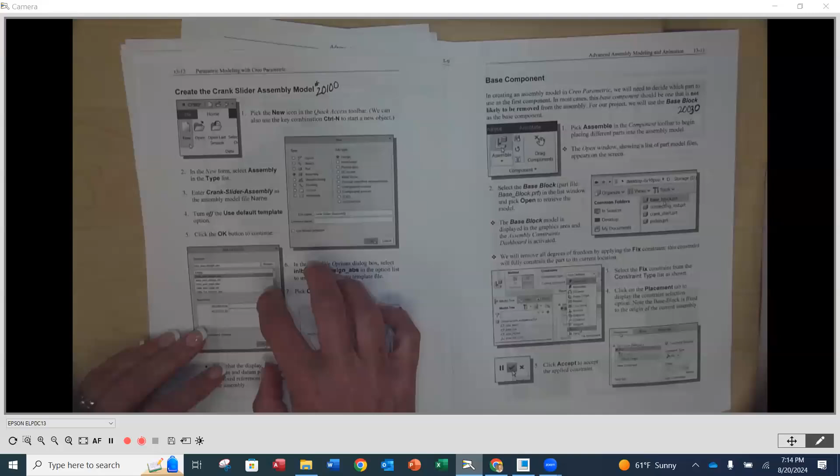Now, as we look at this tutorial, if you get these created and you want to keep going before the next time we meet, then we're going to start putting our assembly together. Starting on page 13-12, it starts the process of putting the assembly together and using mates that are going to correspond to the animation that we're going to be doing. There are different ways that we can put it together, but we want to follow this. So if you want to start putting it together, great. Or if you want to wait for us to do that demonstration, we will do that.

So our process is going to be models. Then we're going to put the assembly together to confirm that everything looks okay. And that's a good idea. Then we're going to go back and do the detailed drawings of each one of the individual parts, the assembly drawing for the entire model together, and then the animation. Okay.